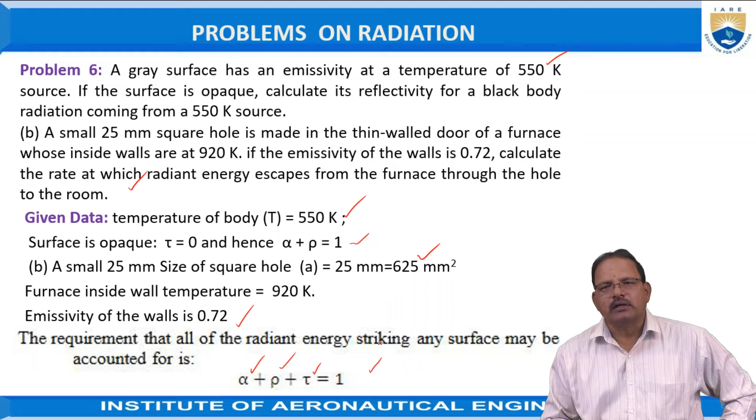So the requirement that all the radiant energy striking any surface may be accounted for gives the relation alpha plus rho plus tau equal to 1. Since it is opaque, the transmissivity is equal to 0, hence alpha plus rho should be equal to 1. This is the equation for the opaque body.

Now, alpha is equal to epsilon, the emissivity, which is given as 0.35. This is according to Kirchhoff's law, which states that the absorptivity is always equal to the emissivity under the same temperature conditions.

So from this relation, rho is equal to 1 minus (alpha plus tau). From this we get 1 minus (0.35 plus 0), because transmissivity is equal to 0, which gives 0.65. The surface reflects 65% of the incident energy coming from the source. So reflectivity is equal to 0.65.

B bit. The small hole acts as a black body. The rate at which the radiant energy leaves the hole is given by E equal to sigma b into A into T to the power of 4. Here sigma b is the Stefan-Boltzmann constant, which is equal to 5.67 into 10 to the power of minus 8.

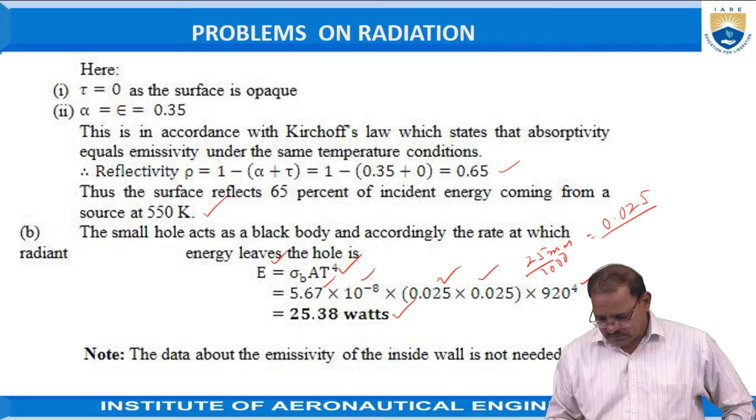Okay, another problem. The temperature of the flame in a furnace is 1900 degree Kelvin. Find, first, the monochromatic energy emission at 1.0 micron per meter square. Second, the lambda maximum value. Third, the monochromatic energy emission at lambda maximum at 1900 degree Kelvin. The ratio of E b lambda divided by E b lambda maximum, and finally the total energy emitted per meter square. These values we have to determine.

Here the temperature of the flame in the furnace is given as 1900 degree Kelvin. Now the emissive power E b lambda is given by C1 into lambda to the power of minus 5 divided by (e to the power of C2 divided by lambda T, minus 1). Here lambda 1 is given as 1 micron, which is equal to 10 to the power of minus 6 meters.

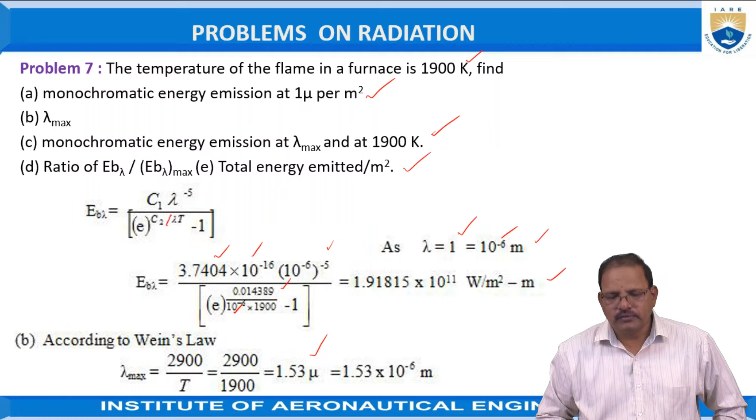The ratio of energy is given now. Here E b lambda is given. The value is equal to 1.91815 into 10 to the power of 11 watts per meter square. Here it is given according to these equations now. E b lambda at the maximum is given 3.183 into 10 to the power of 11 watts per meter square per meter.

So the ratio is nothing but, when we are taking, that value is equal to 0.6048, that is the energy emitted at E b lambda to the energy emitted at maximum wavelength, which is equal to 0.6048.

According to the Stefan-Boltzmann law, we got EB is equal to sigma into T to the power of 4. Sigma is the Stefan-Boltzmann constant, 5.678, into T, the absolute temperature, divided by 100, to the power of 4. So from this relationship we got 5.678 into 1900 divided by 100 to the power of 4.

From this relationship we got 5.678 into 10 to the power of 4 into 1.9 to the power of 4. From this relation we got 0.74 into 10 to the power of 6 watts per meter square. This is according to the Stefan-Boltzmann. The emissive power is given by 0.74 into 10 to the power of 6 watts per meter square.

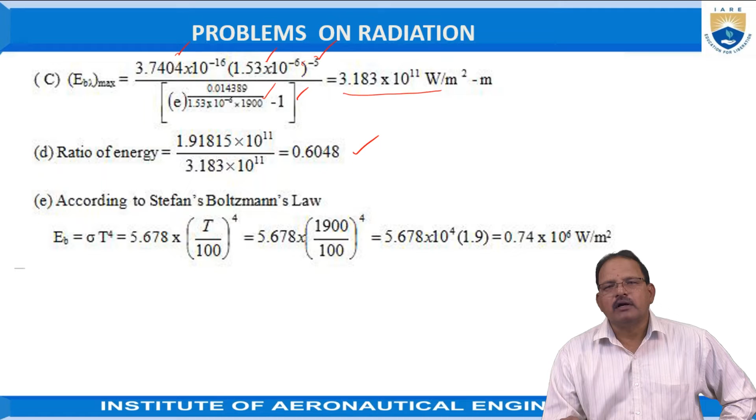A black body of total area 0.045 meter square is completely enclosed in a space bounded by 5 centimeters thick walls. The walls have a surface area of 0.5 meter square and thermal conductivity is 1.07 watts per meter degree. If the inner surface of the enveloping wall is to be maintained at 215 degrees centigrade and the outer wall surface is at 30 degrees centigrade, calculate the temperature of the black body. Neglect the difference between inner and outer surface areas of enveloping material.

So the given data is total area, that is 0.045 meter square. Wall thickness is given, generally represented as delta, which is equal to 5 centimeters. Wall surface area is equal to 0.5 meter square. Thermal conductivity K is equal to 1.07 watts per meter per degree. The inner temperature is given 215 degrees centigrade. Outer wall temperature is given 30 degrees centigrade.

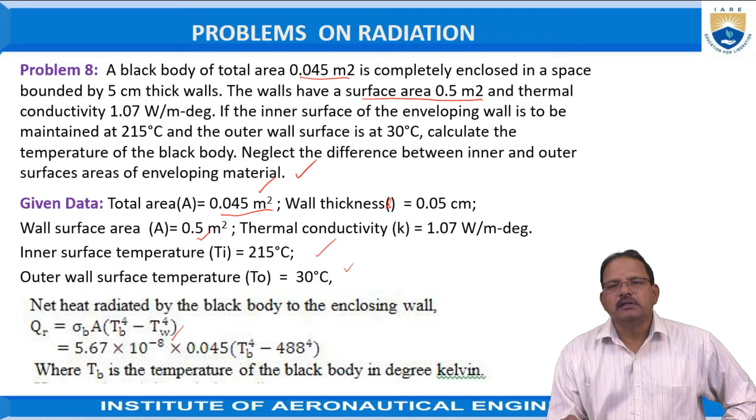So the net heat radiated by the black body to the enclosing wall is given by QR equal to sigma B into A into TB to the power of 4 minus TW to the power of 4. So sigma is equal to 5.67 into 10 to the power of minus 8, into A, the area, equal to 0.045, TB we have to determine, minus 488 to the power of 4, where TB is the temperature of the black body in degree Kelvin.

Problem number 9. A furnace inside temperature of 2250 degree Kelvin has a glass circular viewing window of 6 centimeters diameter. If the transmissivity of the glass is 0.08, make calculation of heat loss from the glass window due to radiations. Furnace temperature is given 2250 degree Kelvin. Diameter is given 6 centimeters, which is equal to 6 divided by 100, which is equal to 0.06 meters.

Okay, transmissivity of the glass tau is equal to 0.08. The radiation heat loss from the glass window is given by Q equal to sigma B A into T to the power of 4 multiplied by tau, where tau is the transmissivity of the glass. Sigma B is equal to 5.67 into 10 to the power of minus 8. A is the surface area of the viewing glass window, which is circular, hence area is equal to pi by 4 d squared.

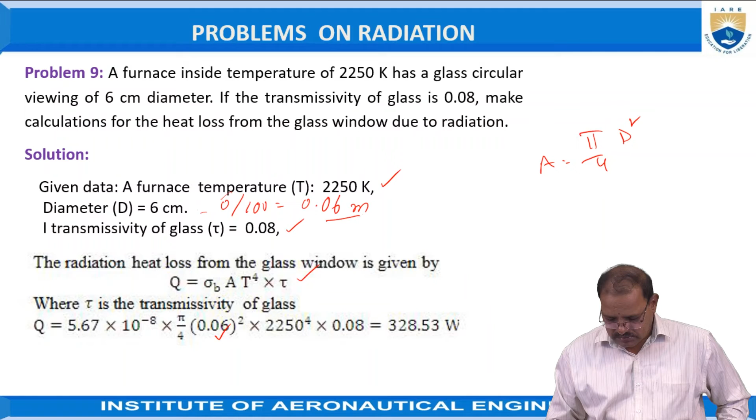From this relation we got pi by 4 into 0.06 whole square into 2250 to the power of 4, and the transmissivity is equal to 0.08, which is equal to 328.53 watts. Here, I take one more problem.

A polished metal pipe 5 cm outside diameter and 370 Kelvin temperature at the outer surface is exposed to ambient conditions at 295 Kelvin temperature. The emissivity of the surface is 0.2 and the convection coefficient of heat transfer is 11.35 watts per meter square per degree Kelvin. Calculate the heat transfer by radiations and natural convections per meter length of the pipe. Take thermal radiation constant.

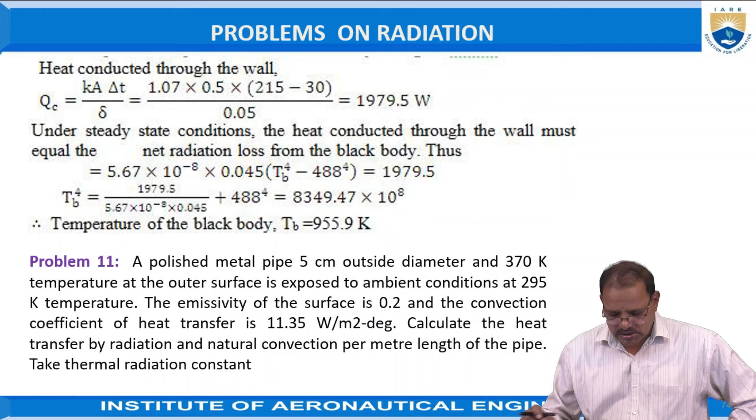What would be the overall coefficient of heat transfer by the combined mode of convection and radiation? Pipe diameter D is equal to 5 centimeters. Temperature at the outer surface is equal to 370 degree Kelvin. Ambient temperature is equal to 295 degree Kelvin. The emissivity of the surface is equal to 0.2. Convection coefficient of heat transfer H is equal to 11.35 watts per meter square per degree.

So, the surface area of the pipe per meter run is equal to pi dL. So, surface area is equal to pi d perimeter multiplied by the length, which is equal to 0.157 meter square. QR radiation is equal to epsilon into sigma b into A into T1 to the power of 4 minus T2 to the power of 4. From this relationship we get 0.2 into sigma b, which is equal to 5.67 into 10 to the power of minus 8. This constant is given, where A represents the surface area, which is equal to 0.157, and the temperature 370 to the power of 4 minus 295 to the power of 4, which is equal to 19.88 watts.

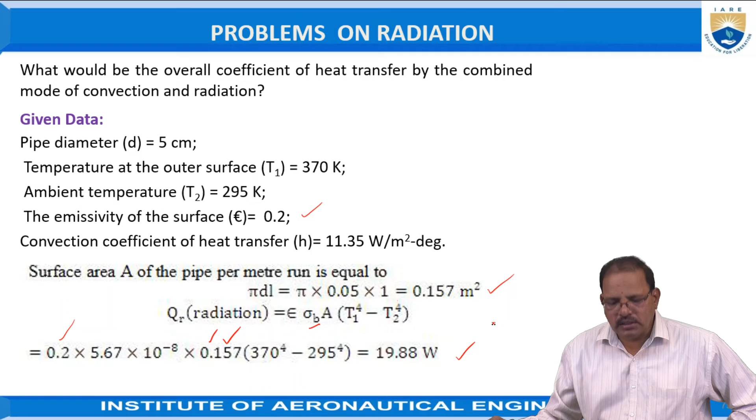Here QC represents the convection according to the relation, which is equal to H into A into delta T, where H stands for the coefficient of heat transfer by convection, which is equal to 11.35. A represents the lateral surface area, which is equal to 0.157, into delta T, the temperature difference, which is equal to 370 minus 295. From this relationship we get 133.64 watts.

So the total energy is equal to 19.88 plus the energy due to convection, which is equal to 133.64, which is equal to 153.52. So the total heat exchange can be expressed as follows.

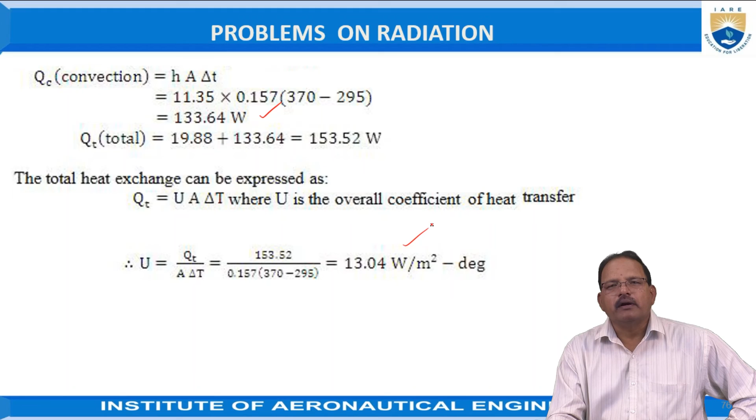Total energy Qt is equal to UA into delta T, where U represents the overall heat coefficient, A is the surface area, and delta T represents the temperature difference. We require the U value, which is equal to Qt divided by A into delta T. So 153.52 divided by 0.157 into 370 minus 295. From this relation we get 13.04 watts per meter square per degree Kelvin.

Problem number 12. A thin metal plate of 4 cm diameter is suspended in atmospheric air whose temperature is 290 degree Kelvin. The plate attains a temperature of 295 Kelvin when one of its faces receives radiant energy from a heat source at the rate of 2 watts. If the heat transfer coefficient on both surfaces of the plate is stated to be 87.5 watts per meter square per degree, work out the reflectivity of the plate.

The metal plate diameter is given, that is 4 centimeters. Atmospheric air temperature T1 is 290. Final temperature is equal to 295. E is equal to 2 according to the problem, that is, the heat source at the rate of 2 watts is given. Heat transfer coefficient is equal to 87.5 watts per meter square per degree Kelvin. Heat loss by convection from both sides of the plate is given. Hence, both sides means you have to multiply by 2.

HA, where H represents the convection heat transfer coefficient, which is equal to 87.5, and A represents the surface area, which is equal to pi by 4 into d square. Here d, for the circular metal plate of 4 cm, is 4 centimeters, which is equal to 0.04 meters. Hence pi by 4 into 0.04 whole square into the difference, 295 minus 290. From this calculation we get 1.1 watts. This is the heat transfer by the convection process.

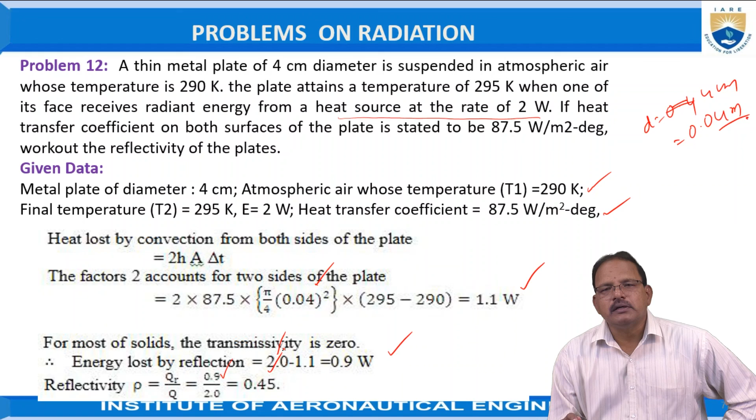So reflectivity is defined as the ratio of heat transfer by reflection to the total energy, which is equal to 0.9 by 2.0, which is equal to 0.45. Okay, thank you.